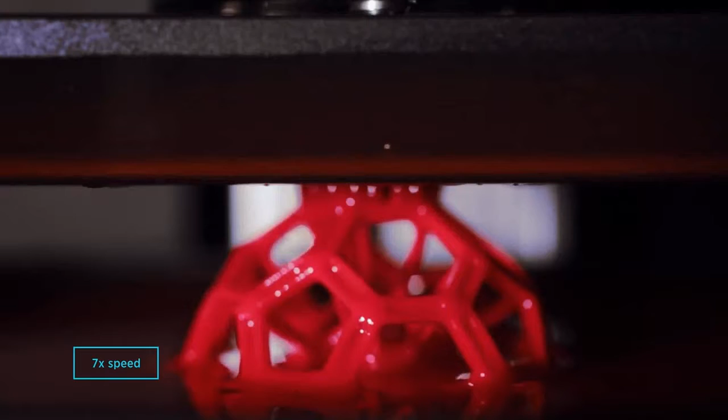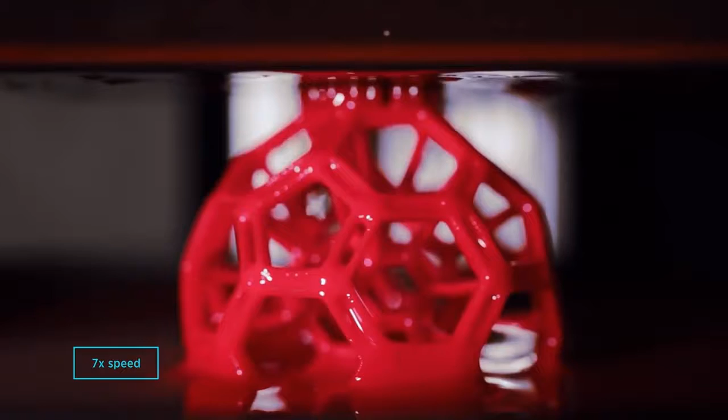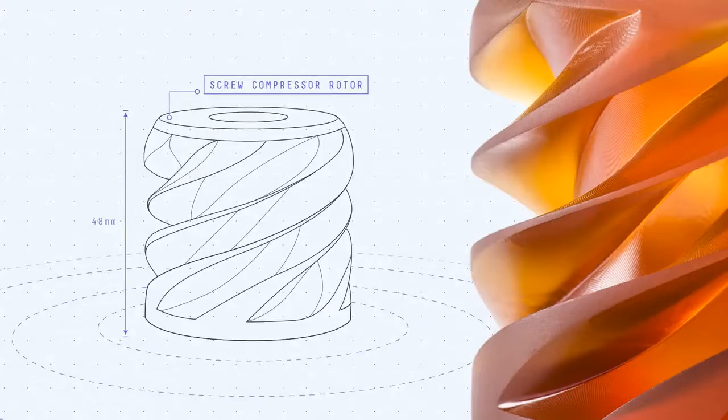Digital light synthesis combines Carbon's CLIP technology and programmable liquid resins to enable end-use parts with exceptional surface finish and unmatched mechanical properties. This screw compressor rotor is at the heart of the company Nativis's groundbreaking air conditioning unit. Advanced, highly efficient compressor designs like this one were previously found only in industrial compressors because the traditional CNC technology needed to fabricate them is expensive.

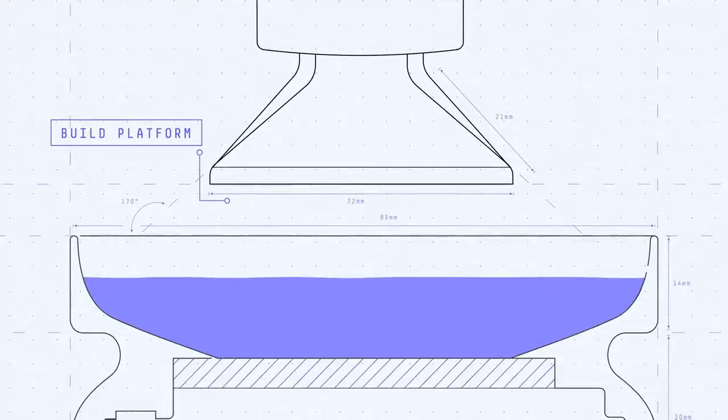With Carbon, Nativis was able to print the rotor in an advanced material called cyanate ester at a fraction of the cost of the CNC alternative. Here's how Carbon's technology works to print end-use parts. Light from a custom high-performance LED light engine projects a sequence of UV images exposing a cross-section of the part, causing the UV curable resin to partially cure in a precisely controlled way.

Oxygen passes through the oxygen-permeable window, creating a thin liquid interface of uncured resin between the window and the printing part, known as the dead zone. The dead zone is only a third of a human hair thick. However, it is the area responsible for Carbon's remarkable high-performance resolution and unique isotropic parts.

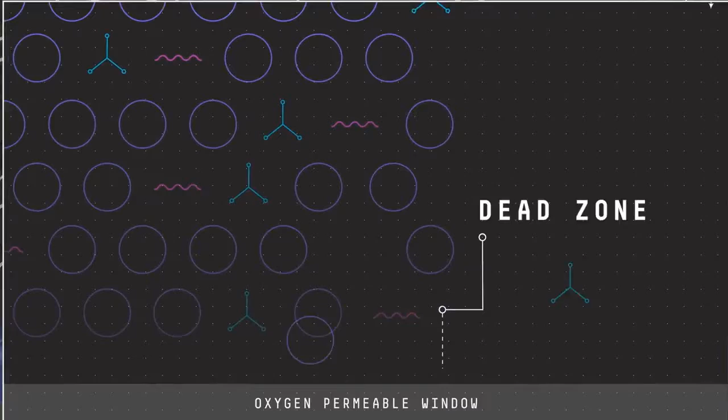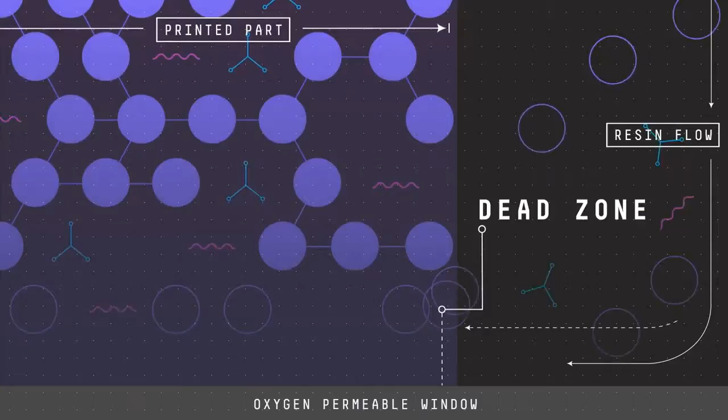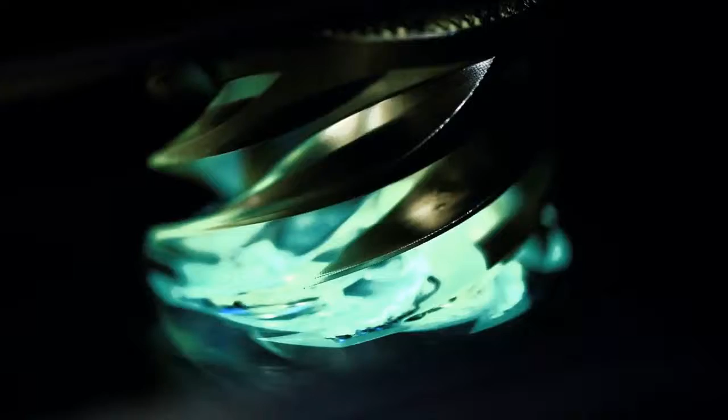In the dead zone, oxygen prohibits light from curing the resin situated closest to the window, thereby allowing for the continuous flow of liquid beneath the part. Just above the dead zone, the UV light projected upwards causes a cascade-like partial curing of the part. Simply printing with Carbon's hardware alone does not allow for end-use properties with real-world application.

Once the light has shaped the part, a second programmable curing process achieves the desired mechanical properties by baking the part in a thermal bath or oven. Programmed thermal curing sets the mechanical properties by triggering a secondary chemical reaction, causing the material to strengthen, achieving the desired final properties.

Carbon is taking manufacturing from analog to digital, printing end-use parts with exceptional surface finish, unmatched mechanical properties, and real-world impact.